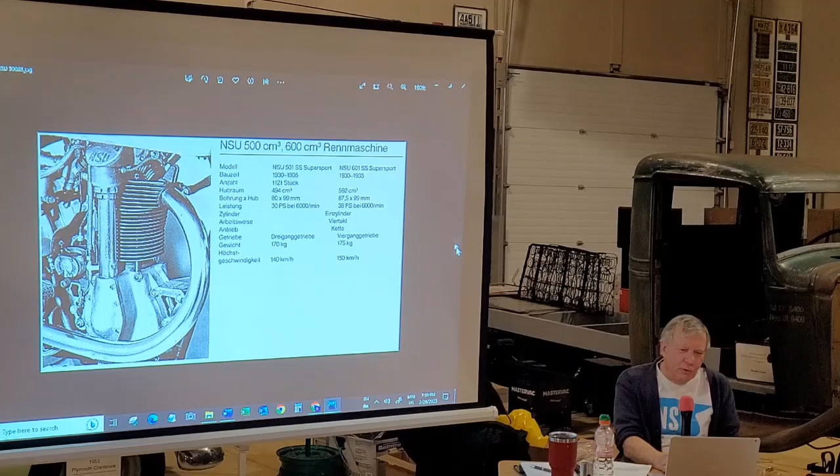who designed the first Norton overhead cam single engines, thought that Norton didn't really appreciate him, and in 1928 he quit and moved to Germany and worked for NSU, and this engine really shows the Walter Moore influence on their designs pre-war. And of course in 1938, when things got hot with Hitler, he went home.

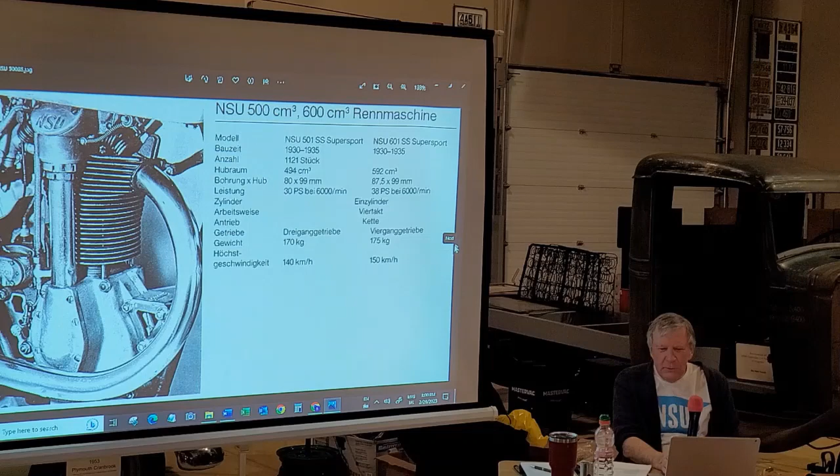So after the war, things changed. Besides that, the factory was bombed right out. They had to start from scratch. This is something I just learned a while ago, but in 1931, they hired Professor Porsche to design a car. And he designed this car, and in 1934, they built prototypes. And they announced that they were going to produce this little car.

But the problem was that NSU had financial difficulties in 1929 in the crash, and so they couldn't manufacture this Beetle because they were basically insolvent, because they had just built a huge new factory to build big fancy cars, and there was no more demand after the worldwide crash in '29. So they sold the whole car business, lock, stock, and barrel, to Fiat with a promise not to make cars for a certain number of years.

So that's why the Beetle was a Volkswagen and not an NSU, because it was actually designed by Mr. Porsche, who didn't have his own company back then, for NSU.

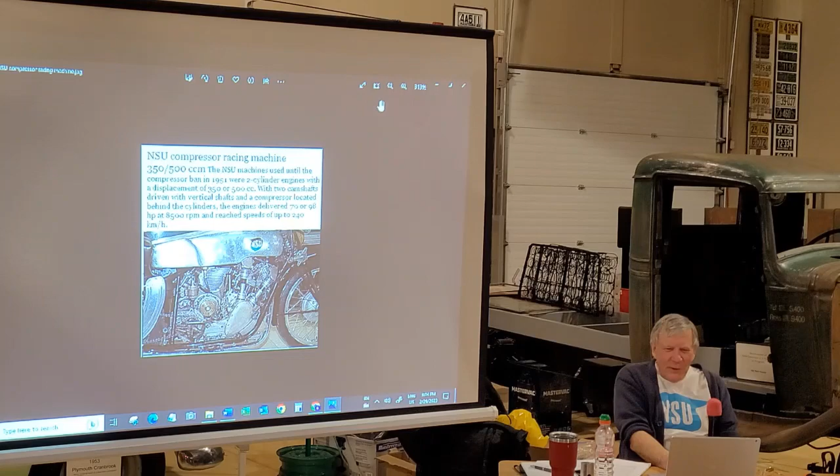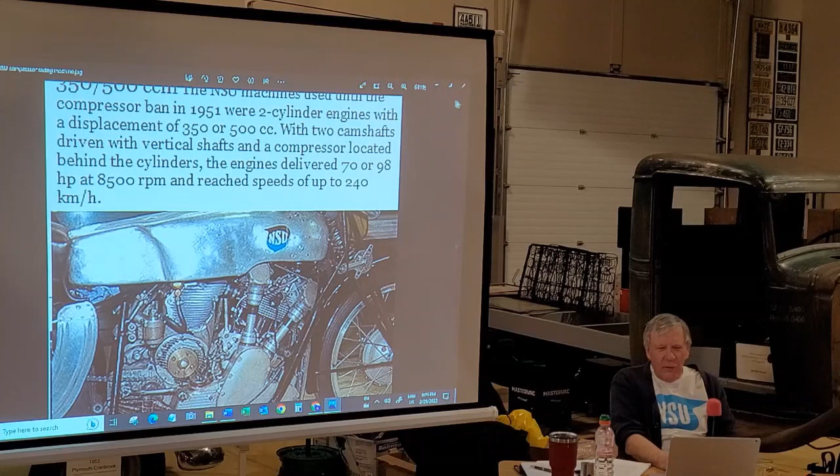This is again a racing machine, but this is a different model. This has the camshafts driven overhead by two different shafts, and it's a real nice engine too. The 500 version of this produced 98 horsepower at 8,500 RPM, which for 1951 wasn't bad. They banned them after the war, in 1951. They banned supercharging. But as long as it was able to be used, it was very competitive.

This bike actually went to Ireland with a veterinarian from Arbor who was a good friend of mine. He moved back to Ireland and pleaded with me, so I sold him this, and I also sold him a Zundapp KS601 twin. He came back and visited me. I hope he still has them, I didn't ask him.

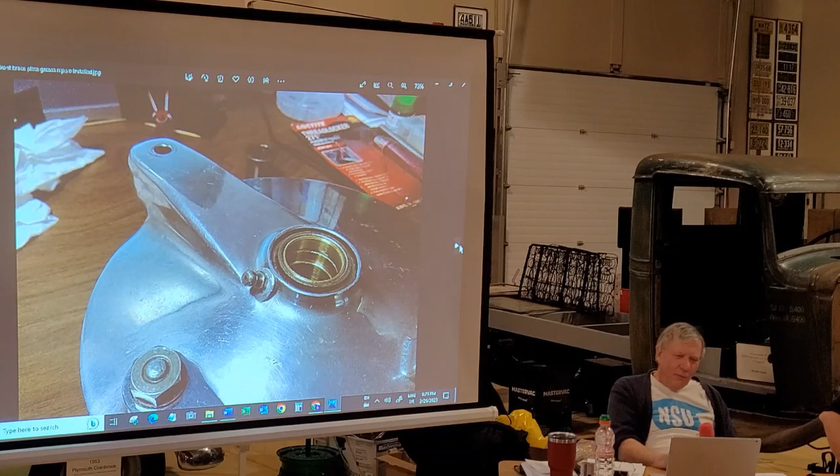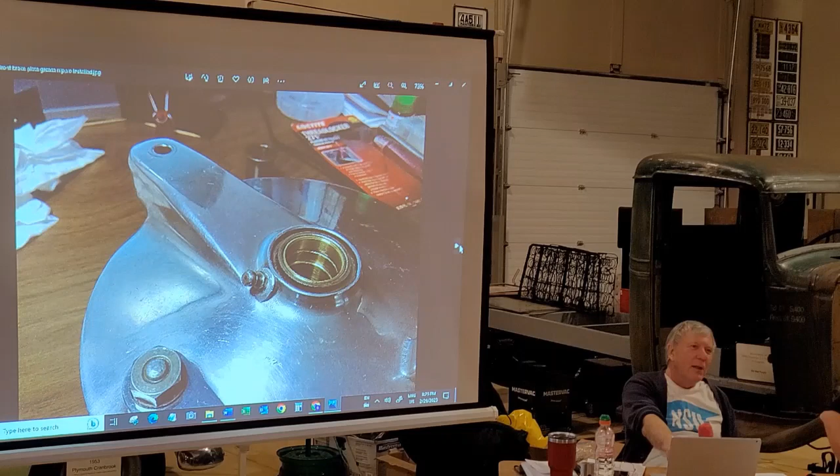And this is the front brake, and it was kind of sloppy because it's a leading link fork, so every time it goes up and down - they had a place for a grease nipple, but it had never been drilled, it had no grease nipple in it, and the hole wasn't drilled through. So I made a new bushing in my lathe with the groove in the middle and the hole, and I put a grease nipple in, and now it's never going to wear out. Oh, cool.

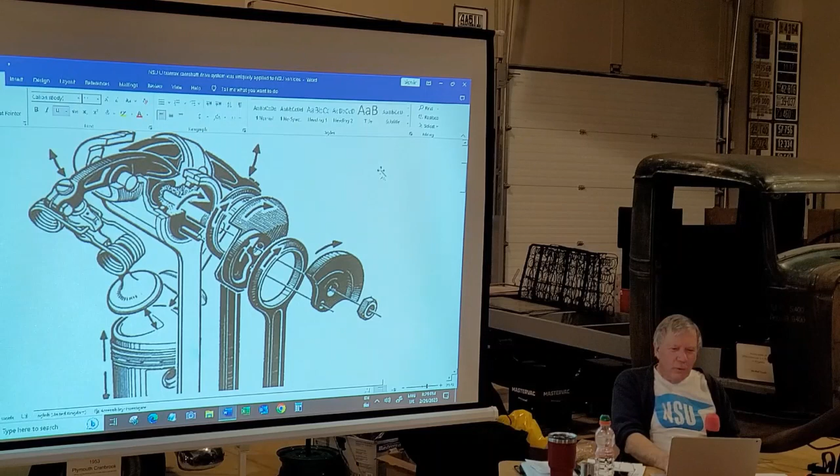This is a picture of it up close. Yeah, for me, I'm a gearhead, so I really love this stuff.

This whole assembly goes together like a Rubik's Cube. When you take it apart, there's only 4 bolts down through to hold the whole assembly and the head down on the barrel—4 big bolts. That's it. Everything else is fitted to tool and die standard, and they made 80,000 like that. The pins that you push through the rocker arms are just a nice slide fit with your fingers and thumb—you never use anything to hit it.

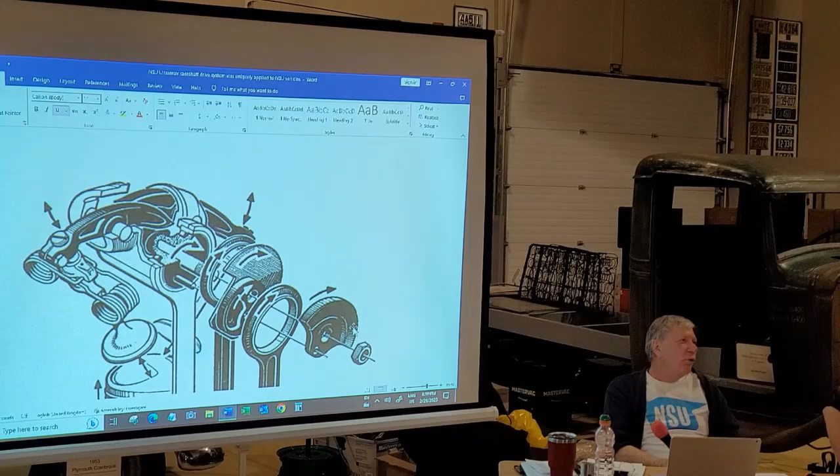A bunch of pieces go together, and then a couple of things slide over the ends, and you put it down, and those 4 bolts go through, and that's it. It's all made to very close tolerances. In the ends of the rocker arms, the adjusters and the tips are a ball with a flat on one side, so that there's never any side thrust on the valve in the guide.

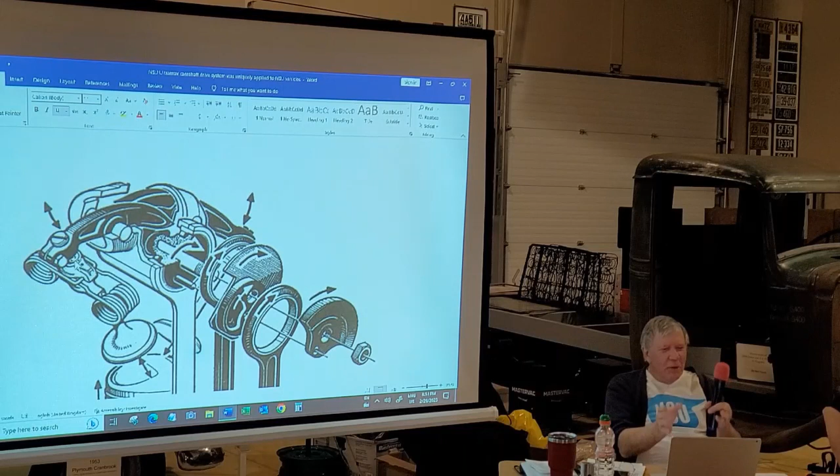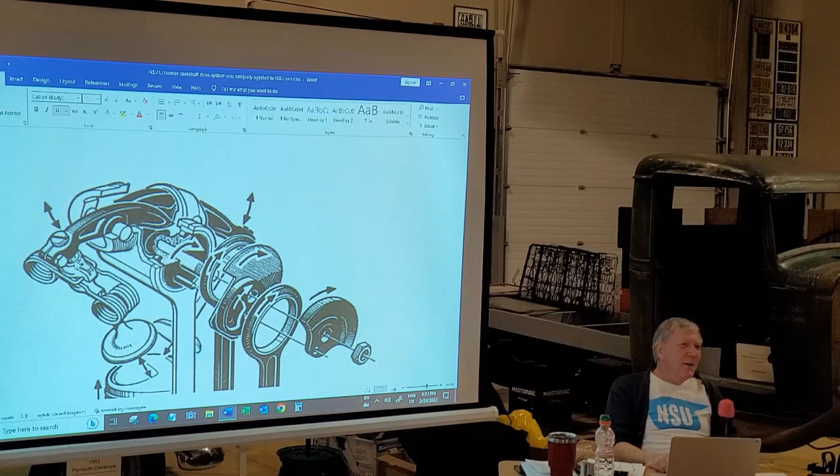Also, the whole camshaft in the pillow blocks can tilt a few degrees either way. It had to, because as the cylinder and head expanded with the heat when it warmed up, the rods would bind up unless it could move back and forth just a little bit to accommodate the expansion and contraction in the cylinder and cylinder head. It was a very complex design, and I still find it hard to believe they made so many of them, but they did.

I think I better quit, because I can talk NSUs all night.